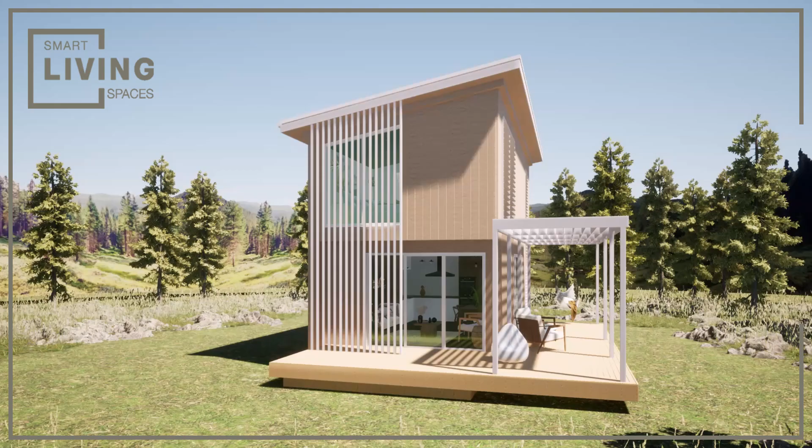It's my mission to make healthy, comfortable, energy efficient and affordable homes for everyday people. So come on a journey with me where I share my knowledge gained over the last couple of decades, because we aren't going to be building better if people don't understand and see the value in changing what we are creating.

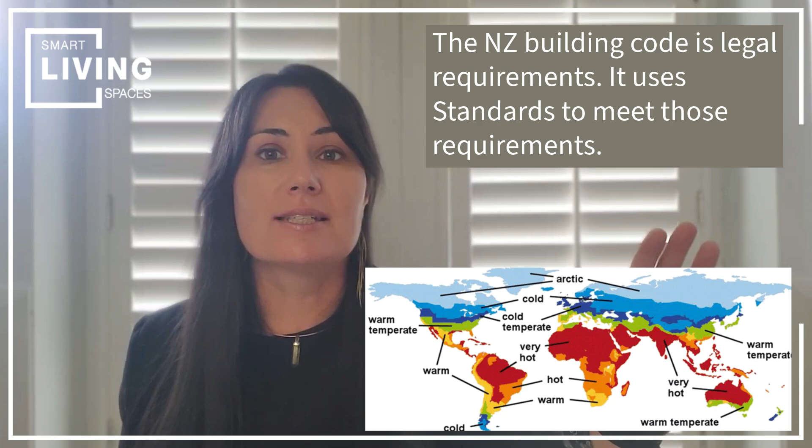The Passive House Standard sits with energy performance. It doesn't sit with sustainable materials. So with the challenges that we're seeing with low embodied carbon in buildings, we're going to have to address that outside Passive House. So the Passive House Standard doesn't replace our building code. Our building code actually uses a lot of standards like NZS 3604, which our Minister Chris Penk has been talking about a little bit. That is actually a New Zealand standard. So the Passive House is actually the same thing as that, excepting it's international.

Okay, so we'll start with ventilation. The part of our New Zealand Building Code that deals with ventilation is called G4. And this sets out the minimum requirements for natural ventilation. And as I explained last month, we rely heavily on opening doors and windows for ventilation. We also have kitchen range hoods and bathroom extracts as part of the ventilation system.

But there is a rule in our New Zealand Building Code that says that for every habitable room, that's a bedroom, a living room, a kitchen, any one of those rooms that we're actually living in, not necessarily a bathroom, we need to provide an opening area of 5% of the floor area of that room. So the World Health Organization says that in order to have healthy air in our homes, in our internal environments, we need to replace that air at an air change rate of 0.35 to 0.5 air changes per hour.

What that means in layman's terms is that the entire volume of air in your home needs to be replaced every 3.5 hours, or every 2 hours if you're using 0.5. So that's a lot of volume, and our building code says just open doors and windows and that will happen.

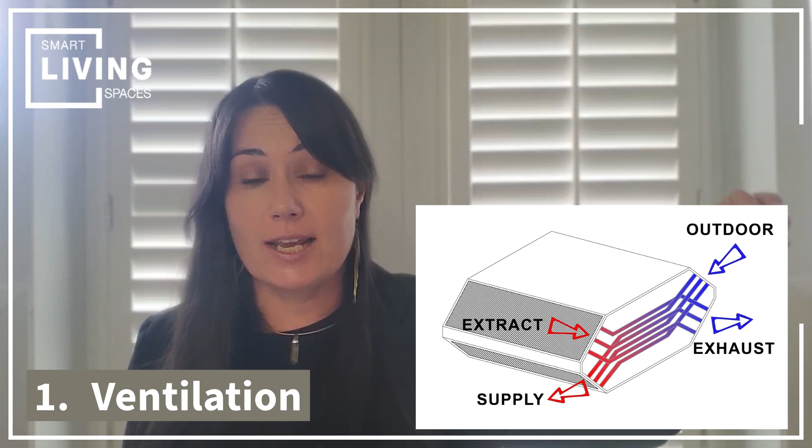So this ventilation system uses outside air. That's really, really important. It's not drawing air from your ceiling space. It's not drawing air through the cracks and gaps in your building envelope, as some ventilation systems say that they work. This takes fresh air from outside, it filters it, and it evenly distributes it around your home to what we call supply spaces, so areas where we pop in this fresh air.

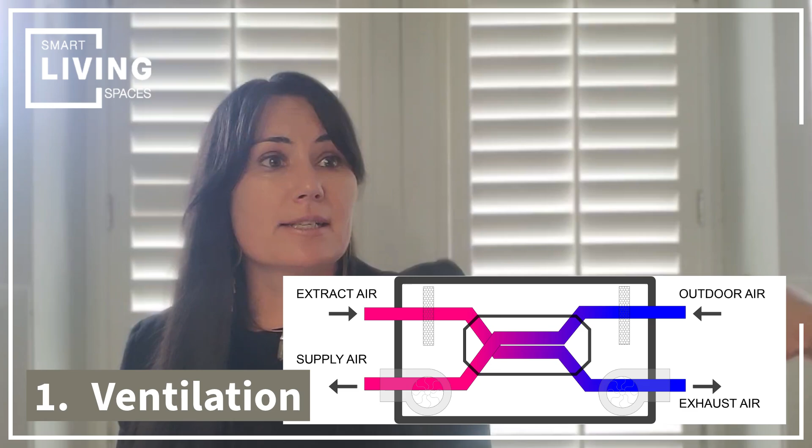Then you will have extract spaces, typically your bathroom and your kitchen areas, where you have a transfer of air from the supply spaces through to the extract spaces, and that is extracted and then distributed back outside. So we know that we're getting fresh air from outside, that it's been filtered, and that we're taking out that stale air, which will be loaded with moisture, humid, and will have high carbon dioxide levels.

It's referred to as a balanced system, because it creates a pressure within the internal environment to ensure that air moves from an area of higher pressure to an area of lower pressure. We watch the weather, we want to see if the wind is blowing, we look at how close the isobars are, and we look at air moving from an area of higher pressure to an area of lower pressure. The ventilation system operates on the same premise. So that's really important to know.

That ventilation system runs continuously, all the time. There is an unoccupied rate, there is an occupied rate for the typical number of occupants in a home, and there's a boost rate. So if you're having a party, you can still ensure that everyone's getting nice, healthy air to World Health Organization standards. So it's guaranteed, not just relying on that 5% of our windows opening and closing.

The next part that Passive House addresses really well, that our building code makes massive assumptions about, is energy efficiency. This is the part of the code called H1. Last month I explained a little about insulation and how we rely so heavily on insulation levels in our building code to create energy efficiency. In February, consultation closed for submissions on H1, energy efficiency, because our government wants to make some changes to that. So you might have heard a lot about H1 just recently.

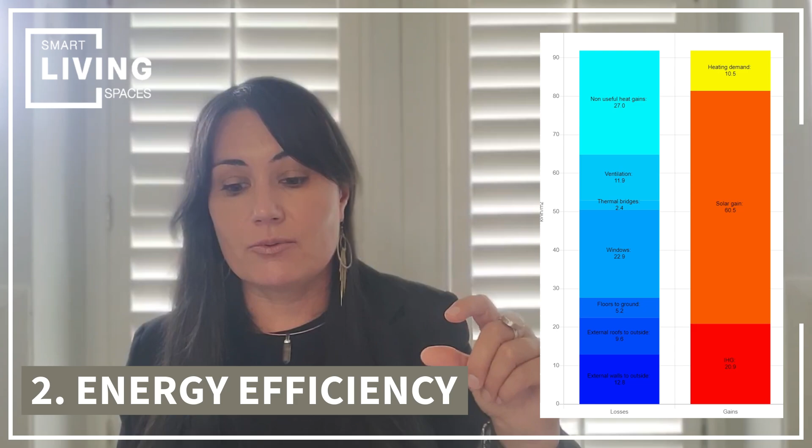Our New Zealand building code just says our buildings can't drop below 16 degrees Celsius and there's no maximum temperature. So this sets a temperature range to achieve that energy, to quantify that energy use. And our passive house standard calls for a temperature range between 18 and 22 degrees Celsius. And as I just mentioned, our building code says legally you can't drop below 16 degrees Celsius, although there's no way to test for that, and there's no way that you have to prove that. It's just assumed in the calculations somewhere that some scientist has gone off and given a prescribed way of doing things for designers to tick the box when they go to council, and there's no maximum.

So the energy modeling is really site-specific, using climate data. It uses NIWA climate data, and it's updated regularly so that we're using the latest, because we do know that our weather patterns are changing. So the passive house standard is actually energy modeling. And as I said, it uses NIWA climate data. And so we've got an energy cap within the passive house standard that says that you can use no more than 15 kilowatt hours per square meter annum to heat, cool, and operate your home.

So what you have to do using the passive house standard is you have to adjust the design to make sure that it meets those criteria so that when it's built and occupied, it actually performs that way. That's not mandatory in our New Zealand building code. So that energy cap, as I said, is 15 kilowatt hours per square meter annum.

BRANZ did some testing around code-compliant homes to see what the energy use would be to keep a code-compliant home, so just a barely legal minimum home, typical in New Zealand, how much energy that would take to keep that at a constant temperature between 18 and 22 degrees Celsius, which is the World Health Organization's recommendations for a healthy indoor temperature range. And that value was about 120 kilowatt hours per square meter annum.

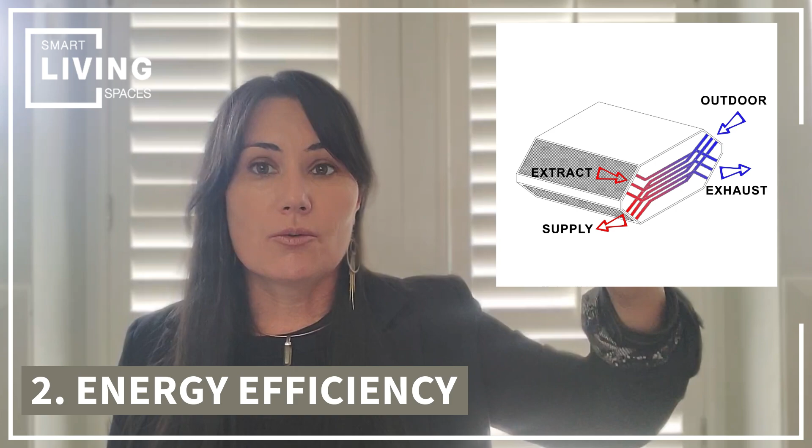So the passive house standard also uses a heat recovery ventilation system. So this is called a mechanical heat recovery ventilation system. It's not just a heat recovery ventilation system. And that means that all the heat that can be recycled in your internal environment is transferred to that dry, fresh air. It's not just recycling heat into your house. The reason why we can't do that is because if we're just recycling that heat, we're also recycling all of the moisture within your home.

We're also recycling all of the carbon dioxide in your home. So that mechanical heat recovery ventilation unit can recycle heat. In a passive house, it has to recycle a minimum of 75% of the heat in the house during the cooler months, which is how we lower some of those power bills. And so that's a minimum.

And it cannot be recycling heat and moisture and carbon dioxide. It has to be recycling heat to dry, fresh air. And so healthy air. Also, dry air is a lot easier and cheaper and quicker to heat than humid air. So there's an efficiency within that system already.

So the New Zealand Building Code cannot actually quantify the energy that's required for a healthy home. It assumes it, and it doesn't actually address it. And it calls on very high power bills from people who are living in these spaces. It doesn't give any consideration to you, the homeowner, who has to afford to live in that house.

The third area that I highlighted as being a gap in our New Zealand Building Code is overheating. You would have heard a lot about overheating just recently too. And this is all related. All of these things have an impact, because remember, our house is a machine for living in. What you change in one part of your house and in one part of the construction is going to have an impact on the performance in another part of the house. It's all related, just like all the parts of a car work together for the car to be drivable. The same thing in a home.

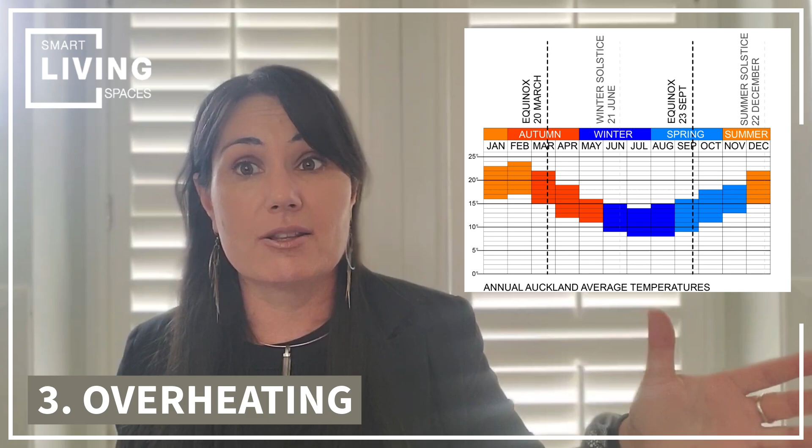Our body temperature is 38 degrees Celsius, 37.8. We know that when babies' body temperature gets close to 38 degrees Celsius, they say you need to take this child to hospital. So imagine what a space that's 38 degrees Celsius is doing to our children, let alone our own bodies. So the only way to stop overheating in your house is to know what solar gains are coming into your space.

So some people have said, oh, insulation causes overheating. That's not really true. It just slows down heat transfer. So if you've got a really, really hot interior, it's going to slow losing that heat out through the insulated elements. But the elements that actually cause our buildings to overheat are the windows, because glass is where we get solar gains in, right? It's also where we get solar losses. So that's where our greatest solar transfer is.

So if we don't know the impact of where our windows are facing, how large they are, what material they're made out of, what the glass is made out of, and how they're installed, we're not actually going to know what the impact of the sun is going to be on that design. So we have these acceptable solutions for energy efficiency in our building code that just focus on insulation. We don't actually legally have to quantify the solar gains, which is why you're seeing designs overheat.

We can use shading to stop the sun from reaching our internal spaces in summer, and that is one of the design approaches of Passive House. So you want to make sure that you've got adjustable shading, and you want to know what the impact of that shading is, because obviously we want to hit those solar gains in winter because that lowers our heating bills, but we definitely don't want them in summer.

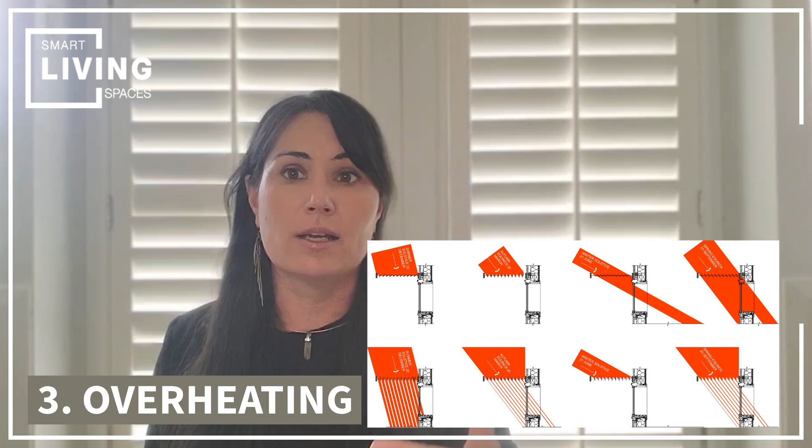Some people think that if you put internal blinds or you close your curtains, that's going to stop your space from overheating. The minute that solar gain has come in past the glass, you now have to deal with it in your internal environment. So the trick is to stop it from getting to your internal environment before you have to then deal with it. So prevention is better than cure.

I do want to make a quick distinction here. Sorry, this was a last minute note. There is a big difference between air conditioning and ventilation, and this is important to deal with overheating.

Lots of people are running out and putting air conditioners in their home, and I completely understand why. But an air conditioner and a heater simply conditions the temperature of the air. So if you have got an internal environment and you're using an air conditioner, all you're doing is cooling that same air. You're not removing carbon dioxide. You're not adjusting the humidity levels of it.

And just to remind everybody about the water cycle that we learned in high school, about how you get rain, you have warm, humid air that rises, it reaches an altitude, it cools, it condensates, and then it drops. So if we've got quite humid internal environments in the hot summer months, and we start conditioning that air, we're going to start to cause condensation within our internal spaces, and that's not great because we want dry homes. So that's just something to be aware of. If you're trying to mitigate overheating simply with air conditioning, you need to pair air conditioning with ventilation.

So the Passive House standard uses the energy modeling to assess where the overheating is happening. It has these strict energy criteria, so you have to adjust your design to make sure that you're not having to deal with overheating. You don't want it to go over 25 degrees Celsius. As I said, our building code says it can go as hot as it likes. And so we're constantly adjusting the design in the concept stages to make sure that we're going to be in line with those targets, because otherwise you can't become certified Passive House. And we need to prove that.

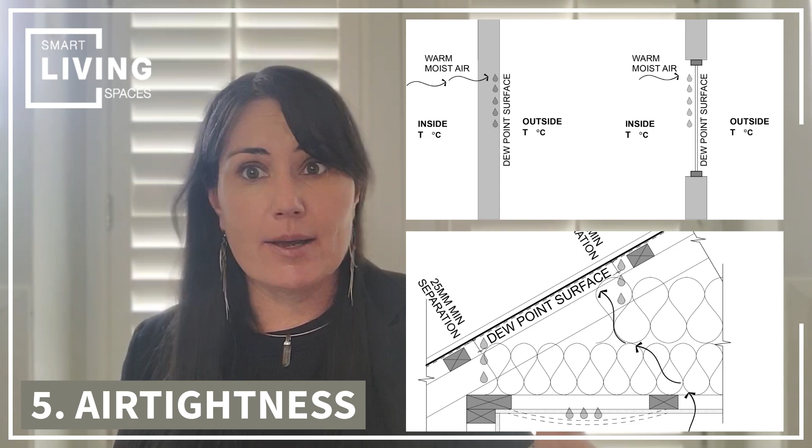And the thing about airtightness is if it's done accidentally, we can actually have silent issues that we're not aware of. Airtightness is one of those things that you have to get done right. And if you don't get it right, you create a big issue. So the airtightness layer in a Passive House is intentional. It's designed into it. It's also tested on site with a blower door test. This is what it does for healthy homes: it stops any air moving through our walls, ceilings, and floors. It's sealed up at all the cracks and the gaps.

The heat recovery ventilation system salespeople will often tell you, especially if you're retrofitting one, we use the gaps and the cracks to pull air in. You don't want any air moving through those gaps and the cracks, because if we've got warm, humid air, either outside or inside, and it's moving through your construction system, and there happens to be a surface that it hits that is cool enough for it to condense, you're going to end up with condensation in your wall, floor, and roof elements that you didn't even know was there, and it's going to cause rot and mold issues out of sight.

Timber is an organic material, so if it gets moist, you're going to get mold and rot in it. And you only really discover this when it's a really expensive repair. We knew this with the leaky building saga that we had in New Zealand in the 2000s. That was caused by rot and mold happening in places where we couldn't see. That happens when you get water or moisture ingress into your structural elements that you can't see. So an airtightness membrane stops any humid internal air from going into those spaces where we can't see it.

Our weather tightness layer on the outside of our new build homes is really good at stopping water and water vapor from getting into that space too. But both those membranes allow water vapor to go out of them, because our timber can have up to 20% moisture content when we close it all in, and you want that moisture to slowly come out, or if there's any moisture in there, you want it to be able to move out of that space, but it doesn't allow water to go into that space.

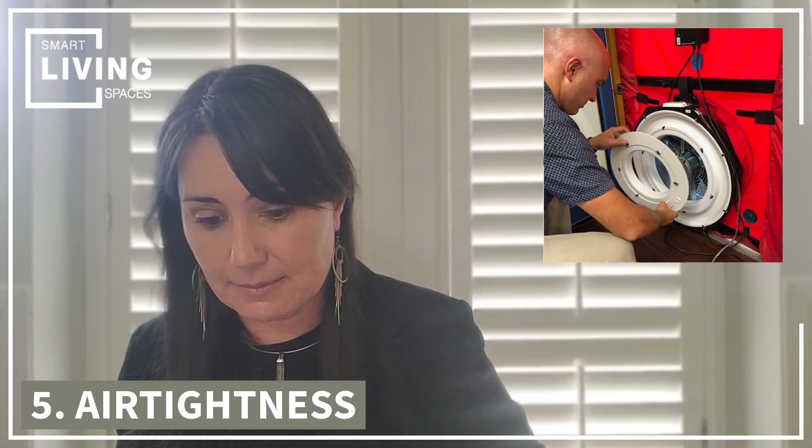So as I said, the Passive House Standard calls for a blower door test. You have to be intentional about the airtightness strategy that you have in the design, and then you test it. We typically do 2 tests. One is before you close everything up with internal lining, so you can identify any gaps in the airtightness layer so that you can then remedy them and seal them up.

And then you have the certification one, which is your final result. So how this works is that you close up your doors and your windows. You put a blower door fan into one of the doors that seals all up, and you have all of these sensors, and you pressurize the building.

So you cannot have an air change rate of greater than 0.6 air changes per hour at 50 pascals in a passive house. And that sounds awfully technical, but what that means is you're testing the leakage of air out of that space. Now, if we were to test a code-compliant home to see what that air change rate is, we're sitting around between 4 and 6 air changes for most of our homes in New Zealand.

So that's kind of accidental air tightness versus an intentional. You can have no more than 0.6 air changes per hour at 50 pascals. And that is to stop that interstitial condensation.

The sixth area that our New Zealand Building Code is not doing as well as the Passive House Standard is insulation. And I know that we've talked about energy efficiency and our reliance on insulation levels, but there's a lot of assumptions in those acceptable solutions about timber content. We build a lot of our homes here out of timber. Timber is a much better thermally performing material than steel.

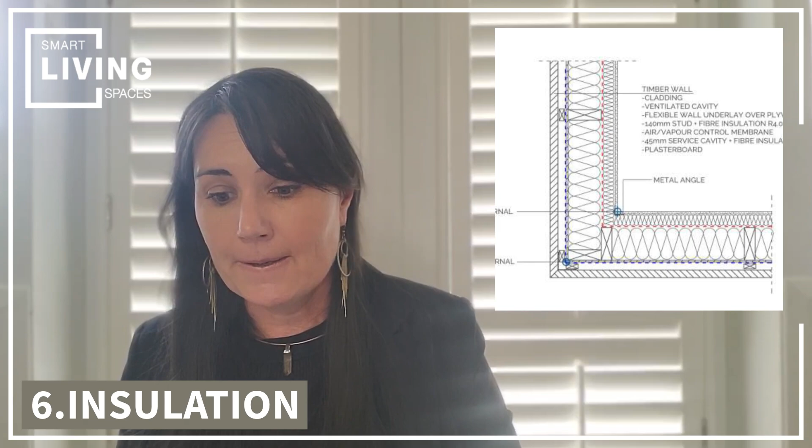We have to model that in Passive House, and we have to quantify the heat loss or the heat gains through those junctions, so that we know where we have to compensate elsewhere to make up for that, because the house is a whole thing. We're wanting the whole thing to perform to those targets.

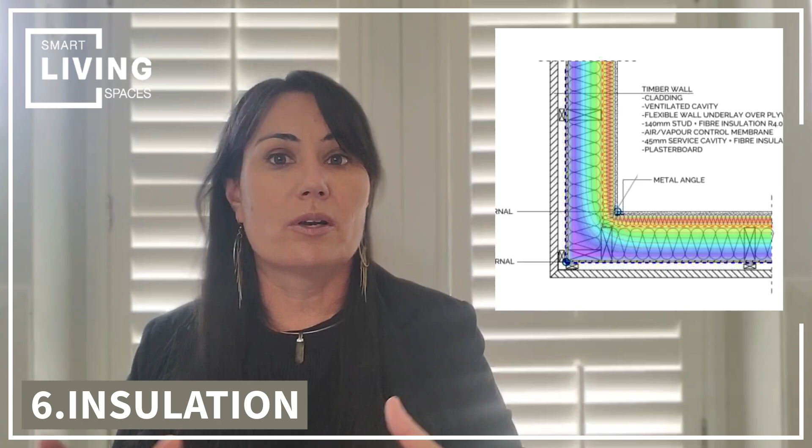So we want to understand what those are doing, and we design them out as much as possible so that we're obviously then not relying on more expense and insulation in order to get the performance. Whereas if we can remove some timber that's not needed to be there, that just seems like a smarter idea. So that's what happens when you are designing to the Passive House Standard.

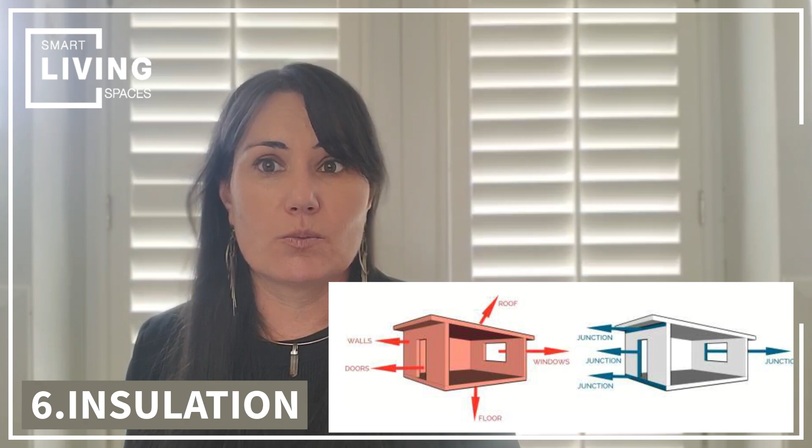We also want to make sure that those junctions, because thermally they're weaker than the spaces that have got lots of insulation in them, are not going to be surfaces where you're going to have condensation against them, and then you're going to have mold or rot forming on those surfaces.

And so all of those junctions are modeled to get what they call an fRsi factor, which is a surface temperature factor, to ensure that we're not going to get mold on the skirtings, or we're not going to have mold behind wardrobes, etc. We don't want mold anywhere in this house, because mold, again, is one of the causes of respiratory illnesses.

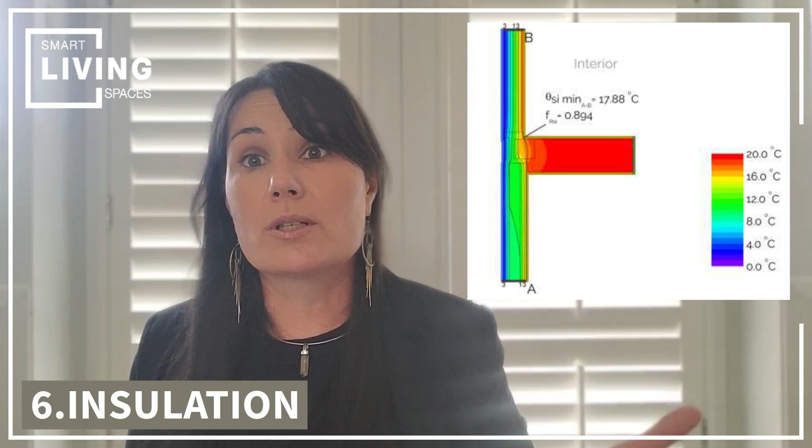So our New Zealand Building Code doesn't really consider thermal bridges. It assumes that we have got 12% timber content in our wall, floor, and ceiling elements, and therefore that we've got 12% of structure and theoretically 88% of insulation in all of those areas, and then that's the generic assumption that's applied to all of those insulation value requirements to tick the box.

But studies have actually been undertaken. A study was done by Beacon Pathways on actual building sites and actual homes, quantifying the amount of timber that is going into our wall, floor, and roof elements. And they found that the 12% that is assumed in our New Zealand Building Code is incorrect.

The amount of timber that's actually sharing our insulation layer is closer to 34%. So that means that the amount of insulation that we're putting into our wall, floor, and ceiling elements is actually not 88% of that element, it's 66% of that element. So even the assumptions that have been made in our New Zealand building code are failing. So our actual built homes are performing way worse than even the minimums that are set out in our code.

So the passive house standard, as I said, calls for those weak spots. We calculate it, you use building science, you use data, and then you compensate for them elsewhere if they're unavoidable, and you use smart, clever designs to ensure that you can design them out so that, prevention is better than cure.

The last element that I highlighted as being a shortcoming in our New Zealand building code is window installation. So, as I said, our building code is treated generally as a design guide, and the one space where this is very, very evident is in a clause or a section called E2, E2/AS1. So it's external moisture. E2/AS1 underwent a massive revamp after our leaky building saga, and everyone scrambled to get better weatherproofing details, which is not a bad thing.

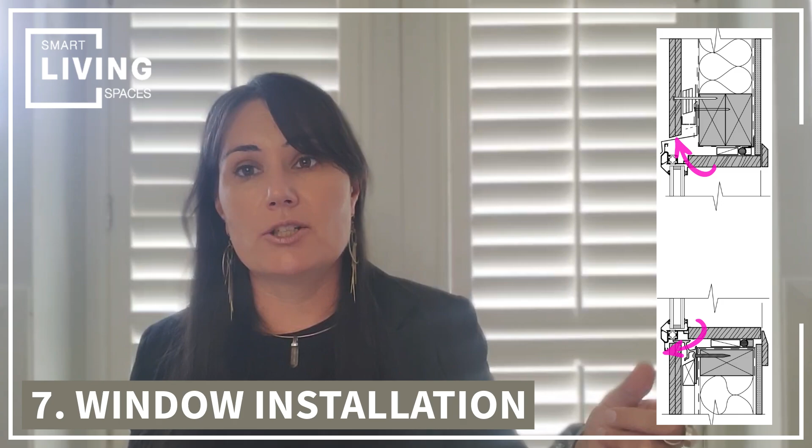So one, it focuses on aluminium, and two, it hangs it outside the cladding line, which means that you've got a clear heat path for heat to track through. So it becomes a very, very weak junction thermally. So what we want to do, and what Passive House calls for, is we want to recess those doors and windows into the insulation line so that we can make that installation detail as high performance as possible.

Also, we want to start using better performance materials. Aluminium has a thermal conductivity of 160. UPVC has a thermal conductivity of 0.18, and timber has a thermal conductivity of 0.13. Now, I know people have a thing about UPVC. I covered this in January's blog where I touched on Stärke UPVC joinery. They recessed their UPVC joinery. We now use UPVC, which is the same material as the Marley spouting, and it's unplasticized, so it's actually UV stable. So the days of using that really poor performing UV material are gone.

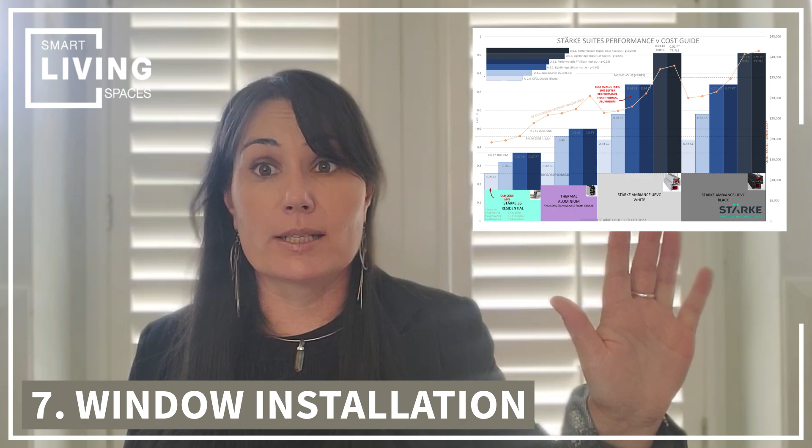And also we're seeing that because our minimum window requirements have been raised up with our minimum standards in the building code, we're starting to see UPVC and thermally broken aluminium becoming price competitive because we're having to use higher performance glass in the aluminium frames to compensate for the poor performance of the aluminium frames, whereas we can use a lower performance glass to achieve those minimums with UPVC because the frame is a better performing frame.

Another issue with using aluminium joinery is because it's a good conductor of heat, they tend to be the coolest surface. So if we're wanting to stop any surfaces within the interior of our environments from having condensation up against them, which then creates mold issues, we want to have materials that are quite thermally stable, and aluminium's not.

So if we're going to invest in better performing windows, we want a better performing installation detail. We also want to know how that installation detail is performing, so we can get bang for our buck. I'm going to quote Benji Simons from Stärke here. He says you can take a high performing unit and completely waste its value by putting it into a poor performing installation. So Passive House calls for that, and it quantifies it, and there's energy calculations and thermal calculations around it.

So that we know the investment in better performance, we quantify it, and we know where we're making it. So that is the 7 ways that the Passive House Standard actually delivers healthy, comfortable, energy efficient homes, rather than just assuming it, and how it fills the gaps of those assumptions or non-considerations within our New Zealand building code. Most of our new homes, particularly those built by housing companies, are built to the minimum standards of the building code.

With cost being used as an excuse. I'm not saying that you should spend a huge amount of money on your house and mortgage yourself untenably. However, I think that there really is a better way to create our homes, and that cost is often used as a barrier to exploring other ways of doing this better. And at the end of the day, our homes are our largest financial investment that we make in our lifetimes. We spend years paying off a mortgage. They're also the space that we spend most of our time in, and they're the space that supports our family's health. So it really is worth investing in getting it right.